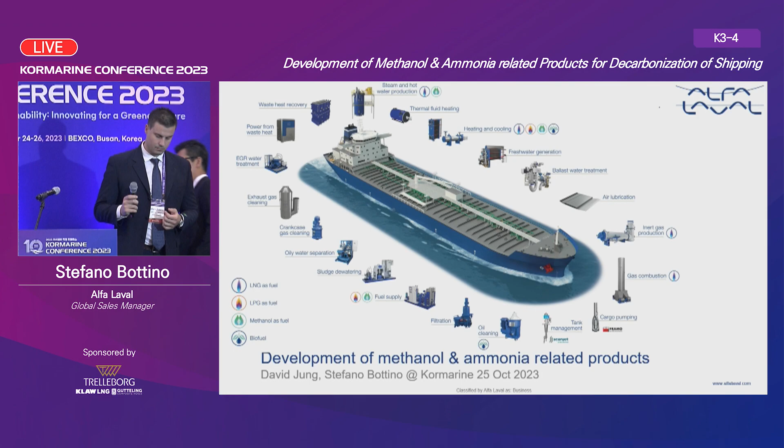Hello, I'm David Jung, Business Development Manager at Alfa, and we prepared this presentation to co-present, but the situation here is a little bit different than we expected. So we are a little bit stepping, come and go, but please take our apologies for that.

In this presentation, we'll zoom out compared to the previous presentations, so we will talk about the very broad aspects of our development activities. That has been actually cut down because, as you see here, we have many different activities and different product groups in the company, so we had to give a short introduction of different things.

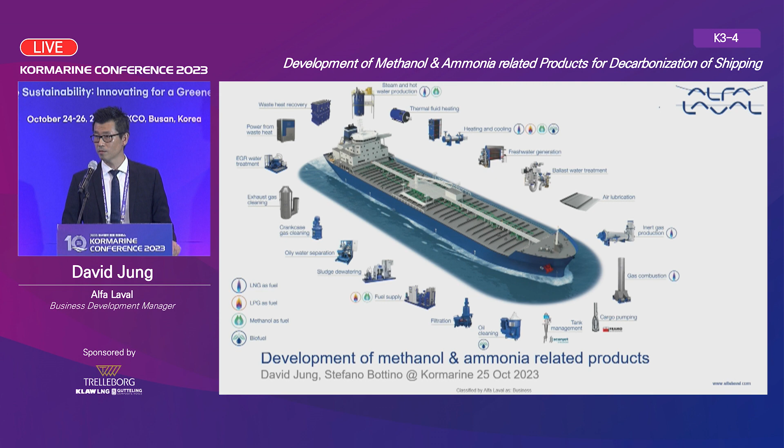Starting with methanol, when you look to a methanol fuel vessel, you have to take into consideration many aspects related to the fuel itself and its properties, rules and regulations that are growing because it's a new solution also for class registers, and also the ship design and operation.

If you look to the properties, the main ones to care of are boiling point, combustion, safety, and others. And this fuel is affecting the ship design for tank design, bunkering, propulsion, electrical power demand, and so on.

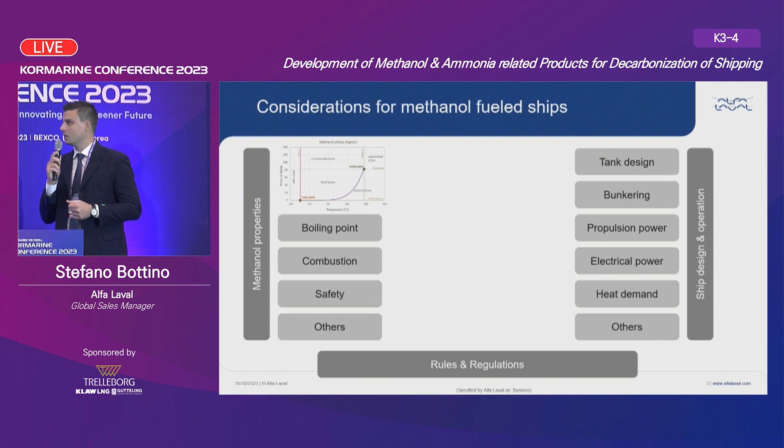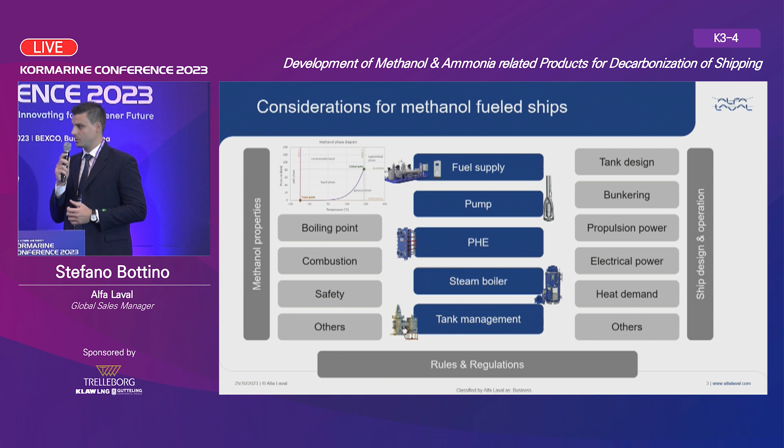Alfa Laval is matching the market demands with some solutions. The fuel supply systems basically transfer the fuel ready to be burned from the tank to the engine, the Framo pumps, the plate exchangers, boilers now ready for methanol, and also the tank management by Scanjet.

If we look to the fuel supply system, yes, we now leave you to look into a short video about methanol from Alfa Laval.

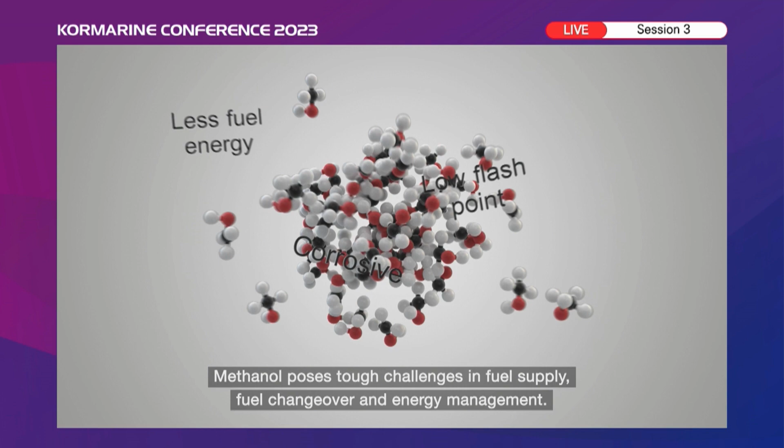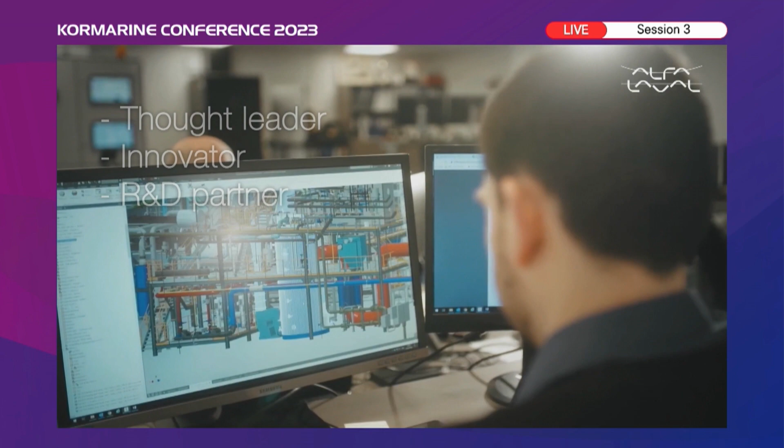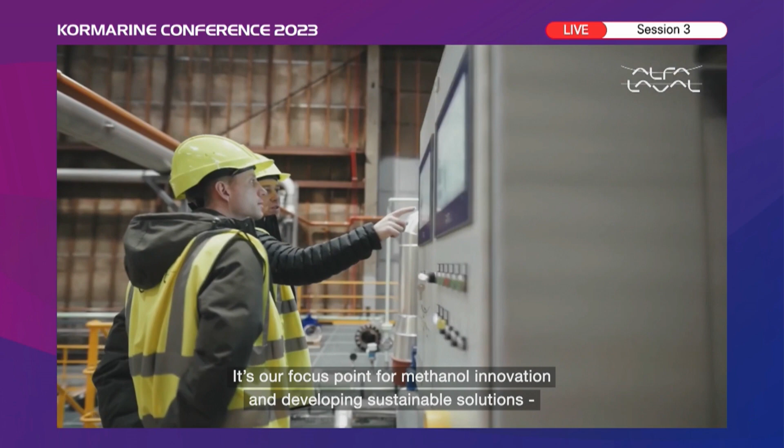For many ship owners, green methanol is the next step in fuel decarbonisation. Already, the first methanol-fueled vessels are setting sail with Alfa Laval technology on board. It's taken much to get this far, including close work with industry thought leaders and front-running ship owners. Methanol poses tough challenges in fuel supply, fuel changeover, and energy management. For many vessels, it will be one of multiple fuels on board, and its lower energy content puts energy efficiency in even sharper focus. At Alfa Laval, we're combining knowledge, technology, and experience to meet methanol's challenges. As a valuable technology partner, we work with our customers and industry leaders to make shipping more sustainable. The Alfa Laval Test and Training Centre is a hub where energy and environmental technology to meet the net zero goals is taking shape. It's our focus point for methanol innovation and developing sustainable solutions to help our customers decarbonise.

Our FCM methanol low flashpoint fuel supply system set sail in 2015, and this long-proven first has expanded into a broad methanol offering, from the first methanol-fired boilers to methanol handling solutions, energy management solutions, and now even connected bunkering support.

Many different solutions will be needed in the maritime energy transition, and Alfa Laval's methanol offering is one part of the whole. It's surrounded by a fuel-flexible portfolio of new green technologies and supported by a global service network built on over 100 years of maritime experience. We're here to support you in full, from succeeding with methanol to excelling in a decarbonised future.

If you look at the first solution from a long list, it's the fuel supply system that, as you have been able to see from the video, started with first delivery in 2015, the first generation of our solution. Then we had many developments, and today we are already in the third generation of this system.

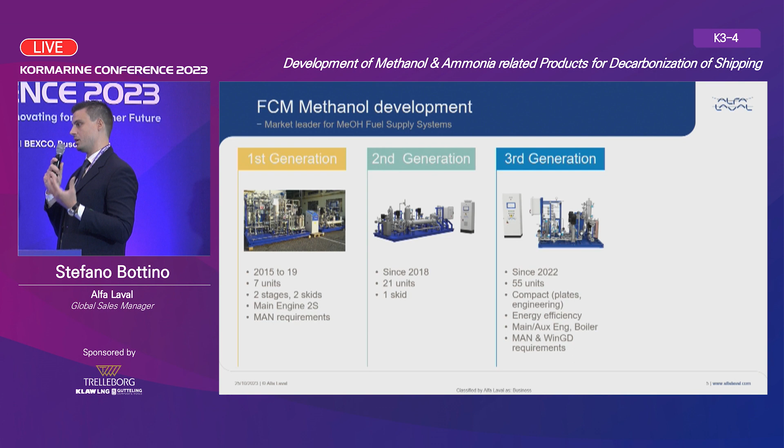Today, our third generation is already contracted for 55 units, and it is state-of-the-art for this technology, being a compact solution with some Alfa Laval core technology inside, like plate heat exchangers, very well engineered, and much more compact than in the past, and we have an energy efficiency

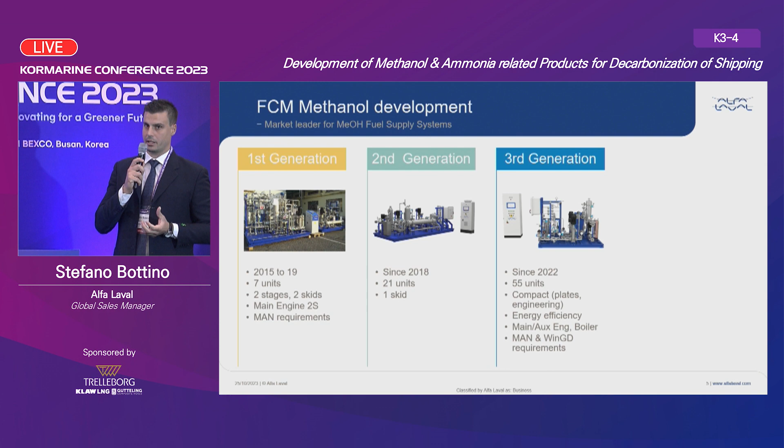software inside. Today it is able to feed the main engine, auxiliary engine, and also boilers if needed, and is compatible with the technical requirements for both MAN and WinGD two-stroke engines.

The application is already available and contracted for basically the main categories of cargo vessel: tankers, container, bulk carrier, and ro-ro. We can already count 200,000 running hours in operation on board vessels.

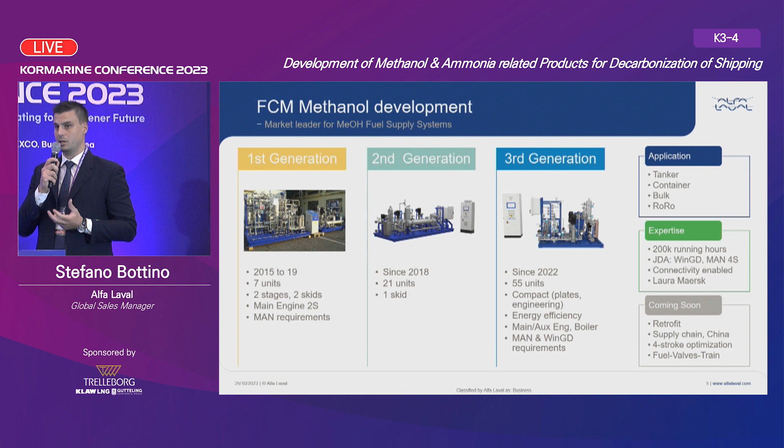And we are now in an ongoing joint development agreement with both WinGD and MAN's four-stroke department. It is a system that is connectivity enabled and has been part of the journey of Laura Maersk, who has been the first completely methanol fueled vessel, both auxiliary engine and main engine, this year.

Next year, we will be present as the first retrofit for a container vessel. We'll have global availability in the supply chain, being both in Europe and in China, and we will develop a four-stroke optimized solution, and also add the fuel valve train in the technology available.

As you can see, all the vessels in operation with methanol fuel have an Alfa Laval fuel supply system on board.

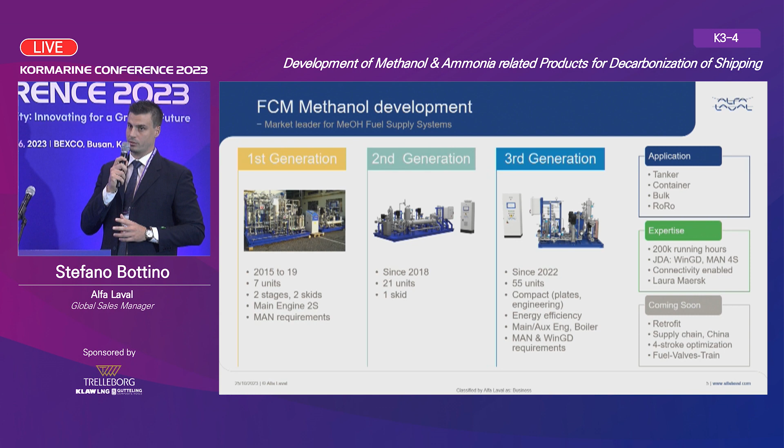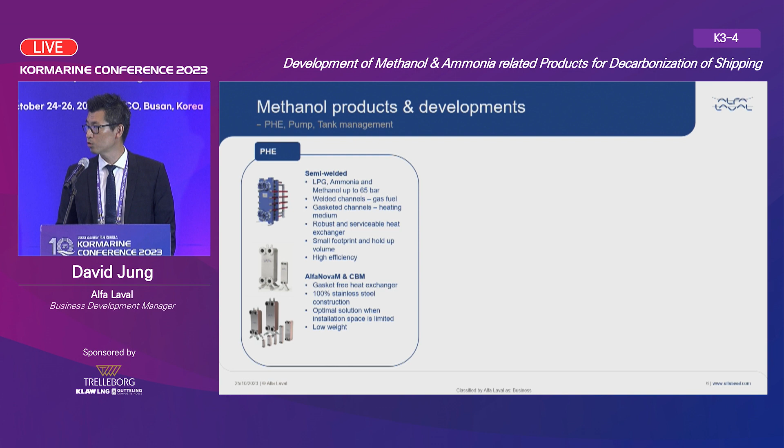When there is a need for smaller installation space and also low weight, we have another solution: the AlfaNova M and CBM type plate exchangers.

Framo also specializes in supplying methanol pumps, used in a configuration where the pump is submerged in the methanol storage tank. This has the benefit of eliminating the hazardous pump room, and the shaft is very short, so reliability is better with this system.

This technology has been used in various applications, ranging from FPSOs, chemical and methanol tankers, as well as the newly introduced methanol-fueled container ships that have come into the market recently.

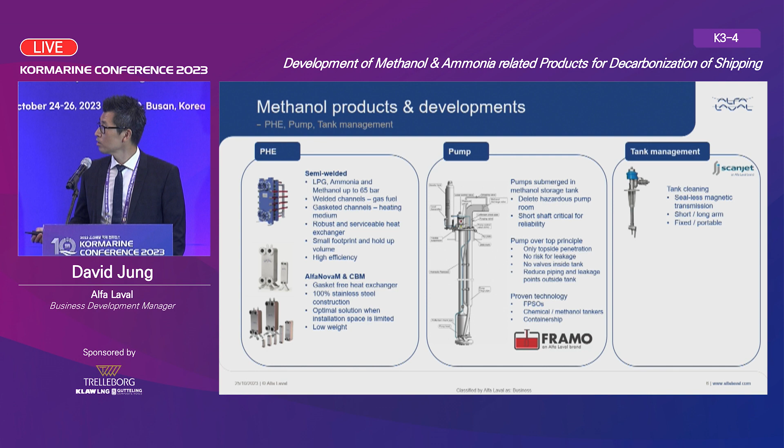Scanjet is now part of Alfa Laval companies, specialized in tank management systems with a very good track record. Its system includes tank cleaning and cargo monitoring systems.

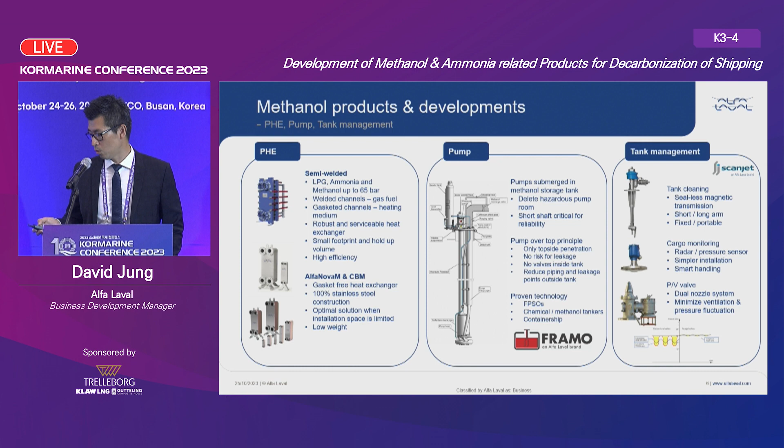I'd like to focus on this PV valve, a dual nozzle system that minimizes ventilation and pressure fluctuation inside the tank. On this graph you see the conventional pressure fluctuation, but using the dual nozzle PV valve system, the tank pressure is much more stable — a good benefit.

Next, I'd like to talk about the dual fuel boiler used for methanol as a fuel. For that, we have smaller boilers that use steam atomizing, side-firing configuration. This is now applied for new builds, and we are also offering the boiler system for the methanol-ready concept. Retrofit is in principle possible when you have a boiler body compatible with this type of burner.

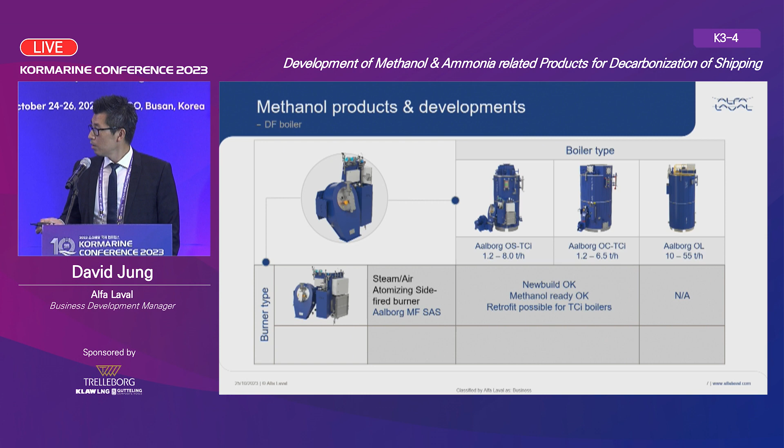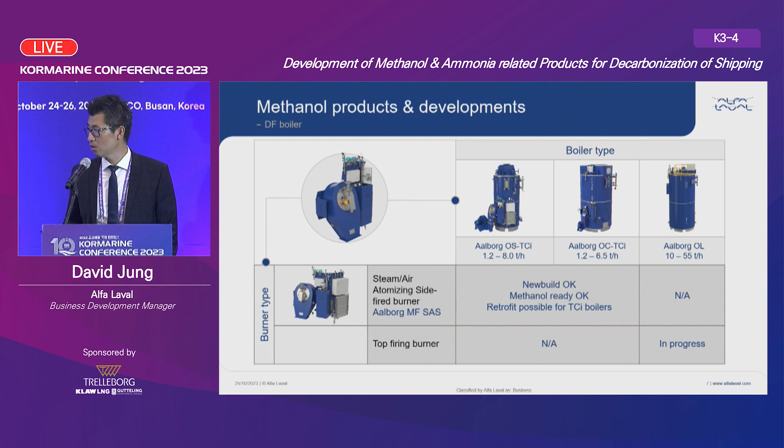For larger boilers, we are working on system design development and recently started testing. I'm proud to say that for methanol-fueled boilers, we have secured 100% market share until today, even though the adoption rate has not been so great.

That concludes our presentation about methanol, and now we'll move on to ammonia-fueled ships. Similar concept to what Stefano introduced previously: we consider three aspects.

With ammonia as a fuel, we have more considerations about its boiling point, which is minus 34 to 35 degrees, so ammonia exists in a gaseous state, requiring additional considerations. Also, the combustibility of ammonia is very challenging, and the safety aspects are another challenge to overcome.

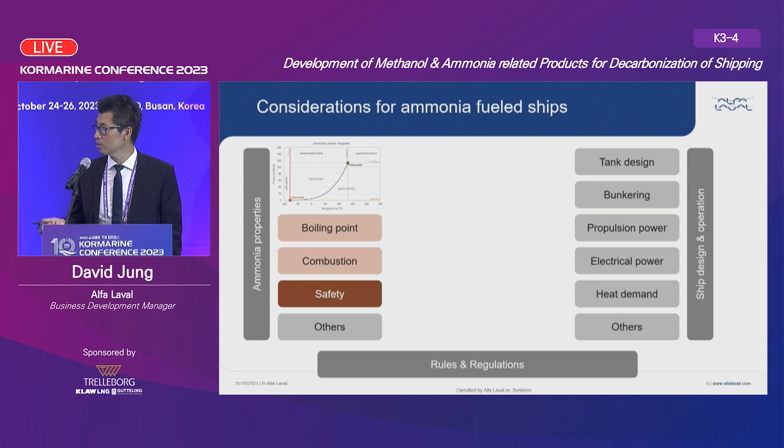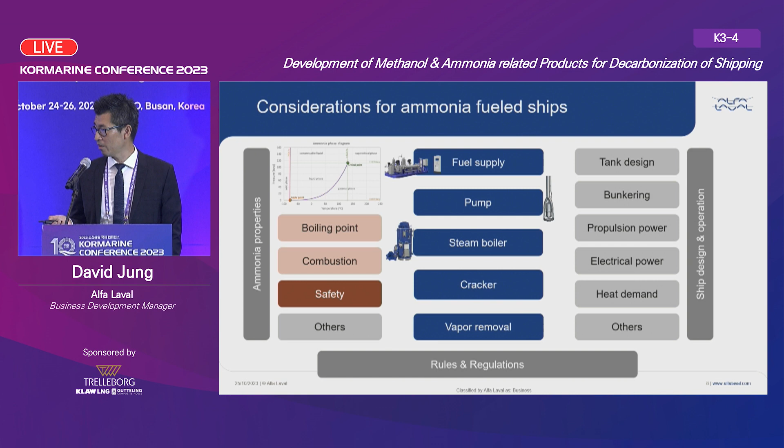Putting the properties of ammonia together with ship design aspects, we concluded that a fuel supply system will still be needed, since there will be a main engine or other propulsion using combustion of ammonia, and a pump system will need to be installed to supply the fuel system. A steam boiler will also be required because there's a heat demand. We also came up with two additional products: the ammonia cracker and the vapor removal system, which we'll talk about in later slides.

Same as methanol fuel being a carbon neutral solution, Alfa Laval strongly believes ammonia will be the first net zero fuel available on the market, and the same goes for the ammonia fuel supply system. We want to be the first partner for the industry, and also the proven technology that shipowners and shipyards can turn to.

For this reason, we are already joining development programs with major stakeholders like the Zero Carbon Shipping Maersk Mc-Kinney Moller Center, with a solid oxide fuel cell for maritime project that will be tested at the end of this year. We already supplied the cold box and hot box for this utilization, and it will be executed at the Alfa Laval Aalborg Test and Training Center.

We have the same project ongoing with WinGD's two-stroke engine, starting end of the second quarter next year. We are supplying the injector test rig and single cylinder fuel supply systems for both of them.

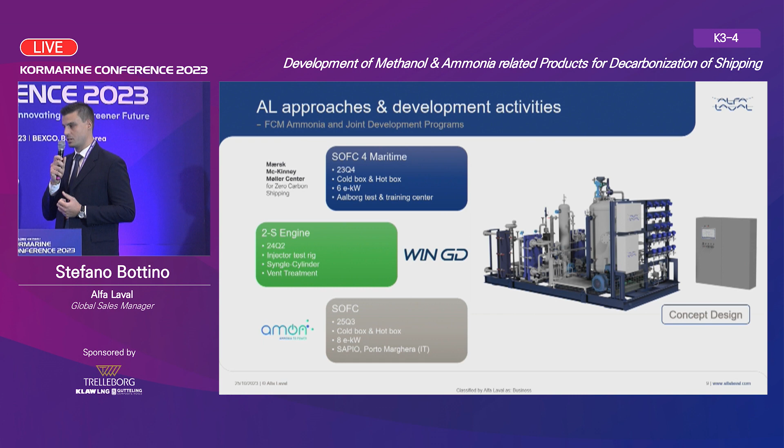With a land-based vent treatment system, and the Ammonia On project — a European-funded project for land-based application with many companies contributing — we supplied the same scope. It will start Q3 2025.

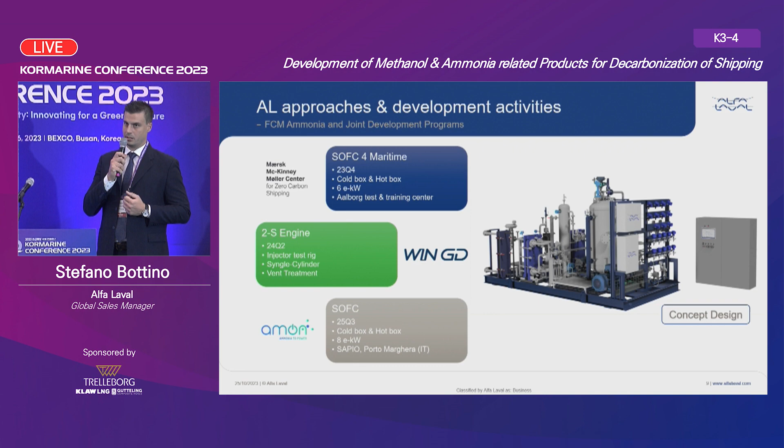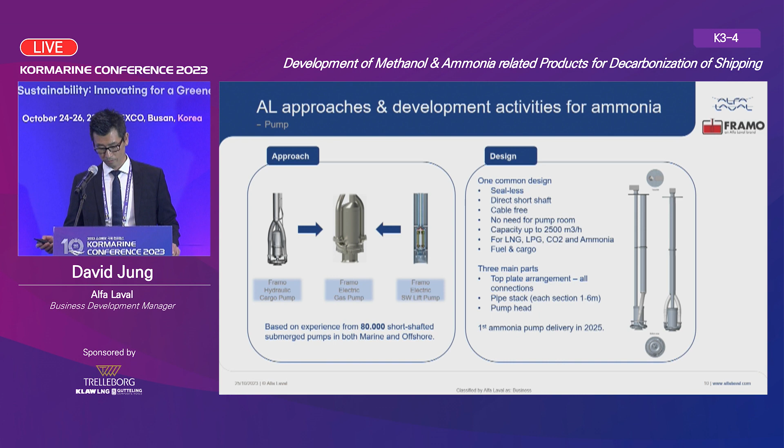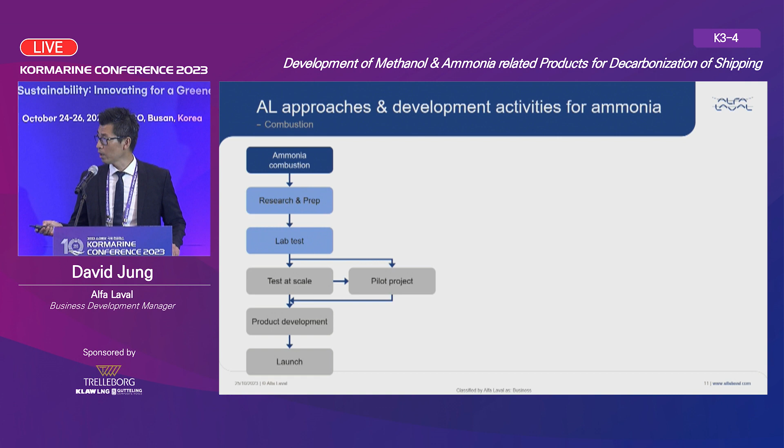For the combustion used in the boiler system, our approach is to do more in-depth research and preparation than we normally do on boiler development, because ammonia has a very challenging combustion behavior. We have started doing laboratory tests since the beginning of the year.

We achieved a successful ammonia combustion with our pilot fuel based on this. The next step is to find the optimal condition for ammonia combustion, and also to do the test at scale, placing it into the 2-ton boiler already installed in the test and training center.

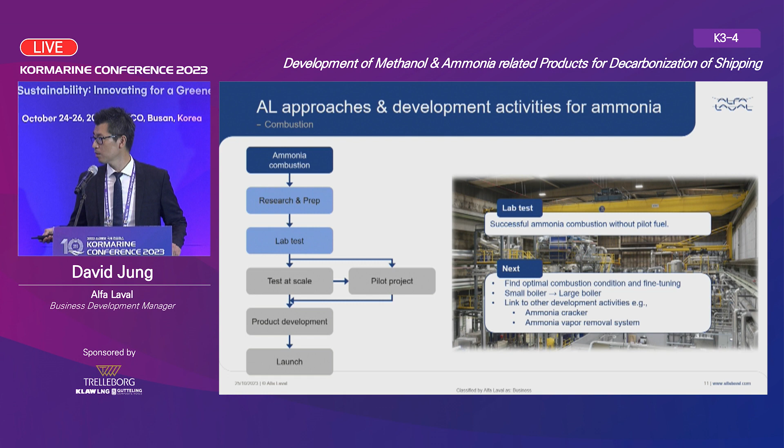The ammonia combustion is also linked to other types of solutions, the ammonia cracker and the ammonia vapor removal system, which I will talk about in the next slide. As Stefano mentioned, the AMON project is one we are working on at Alfa Laval together with other partners, as mentioned at the bottom of this slide.

The main purpose of this project is to generate electrical power out of ammonia as a fuel. The first step is to put the ammonia through a cracker, which breaks it down into nitrogen and hydrogen. The hydrogen is then used in the solid oxide fuel cell system. As the system requires some heat to operate, we have a burner and a heat recovery system, plus a recirculation system to optimize system efficiency.

The objectives are like this - I won't go into much detail, but our aim is to make an 8 kilowatt unit that is reliable and has generated 70% system efficiency.

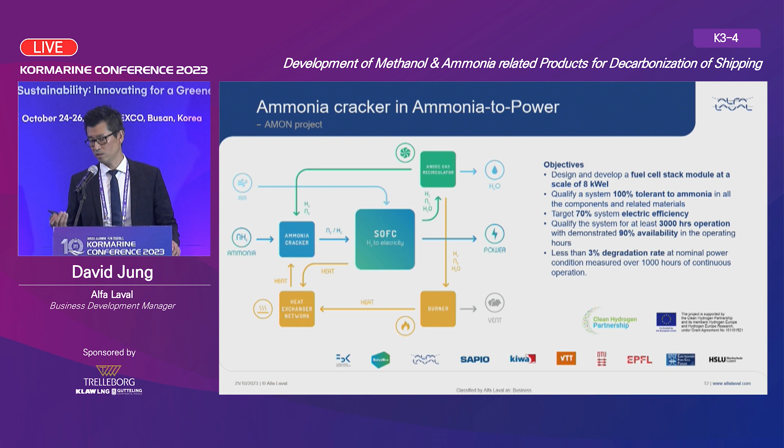Ammonia vapor handling system is the next one on the line, and we've identified that there will be different scenarios where ammonia in gaseous state is generated, and this vapor content will need to be reduced or removed before it's ventilated to the atmosphere. We think there will be various scenarios: small flow to large flow, low pressure to high pressure, high ammonia trace to low trace, and so on.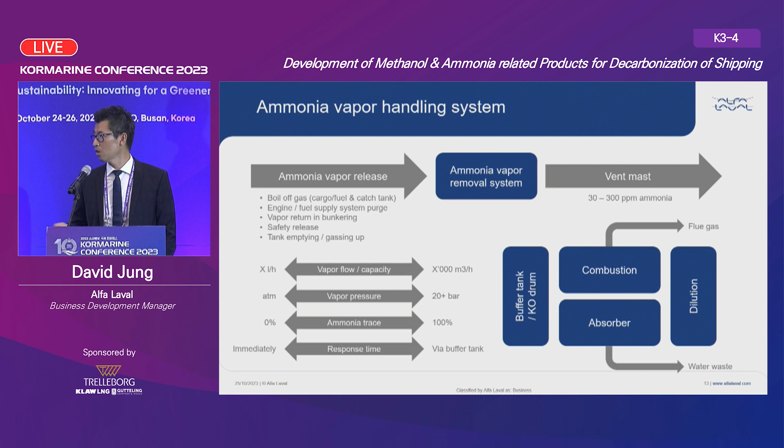Our approach is to look at both combustion and absorber-based solutions, and each has its own pros and cons. So maybe it's good to start a discussion about having two systems on the drawing board, and think about the ups and downs of these systems.

That concludes our speech about ammonia. Very quickly - not only for ammonia and methanol, we are also working on various solutions that are fuel independent. One of them is the StormGeo solution.

That helps optimize the vessel's operation through giving advice on the go - what is the best road to take, considering fuel consumption, ETA, and so on.

In this system, we are adding two additional features. They will give benefits for the ship owner and ship operators to simulate and monitor the expected fees coming from the EU ETS, and also what is the current status and expected rating of CII if the vessel continues to operate in the same manner.

So in conclusion, we are working on many things for ammonia and methanol. For methanol, we have secured and developed industry-leading products, including the plate exchanger pump system used for many years, and the methanol fuel supply system as a new system to the market based on market needs, as well as the dual fuel boiler. For ammonia, we are starting our journey, and it's being accelerated as market demand seems to be on the rise. We are also working on fuel independent solutions.